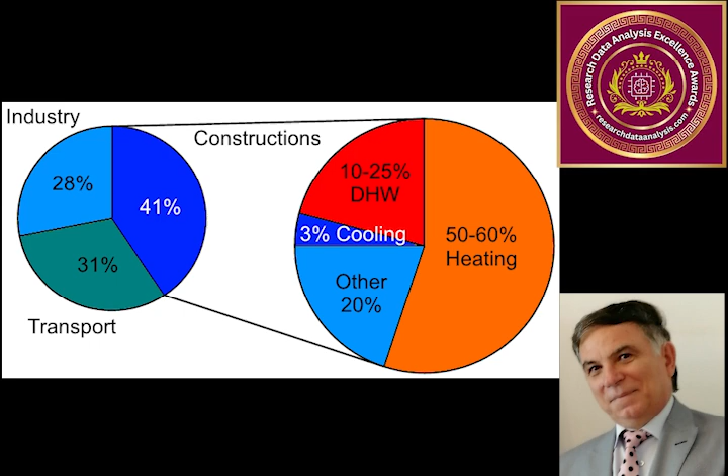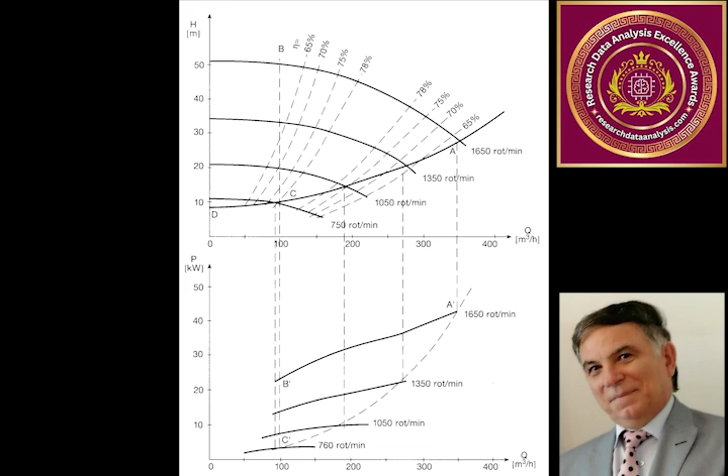Numerous fundamental and advanced theoretical, experimental, and numerical studies were conducted. They have been published in different journals and have made significant contributions to advances in building services engineering, which can be grouped into the following categories. 1. Energy optimization of buildings that simultaneously achieve energy savings, increase comfort, and ensure normal air quality in rooms. 2. Energy analysis, modeling and optimization of district heating systems and low-temperature heat distribution systems in buildings.

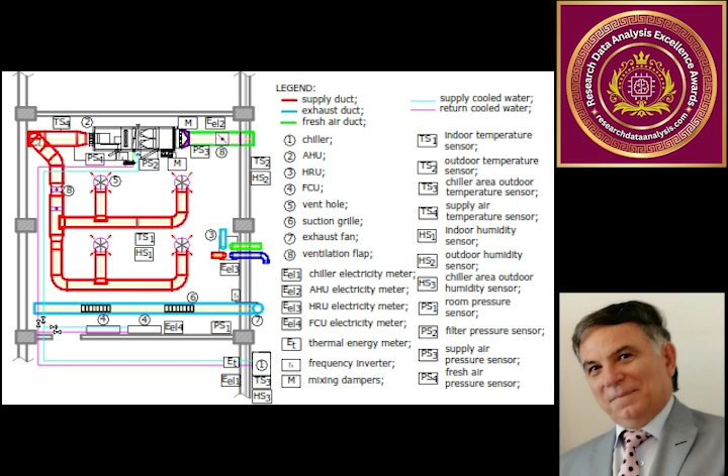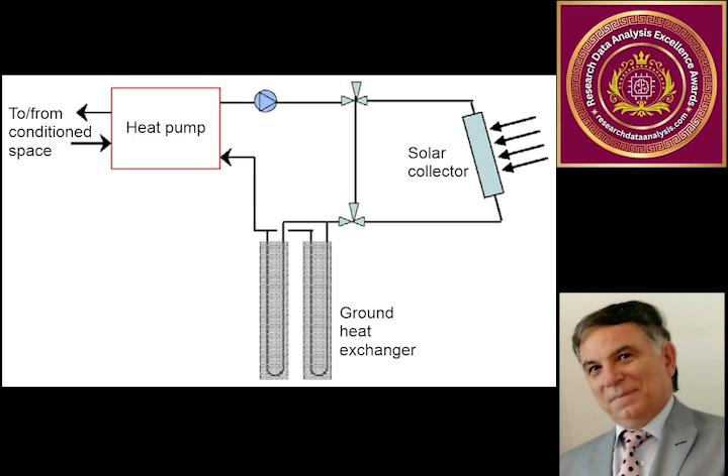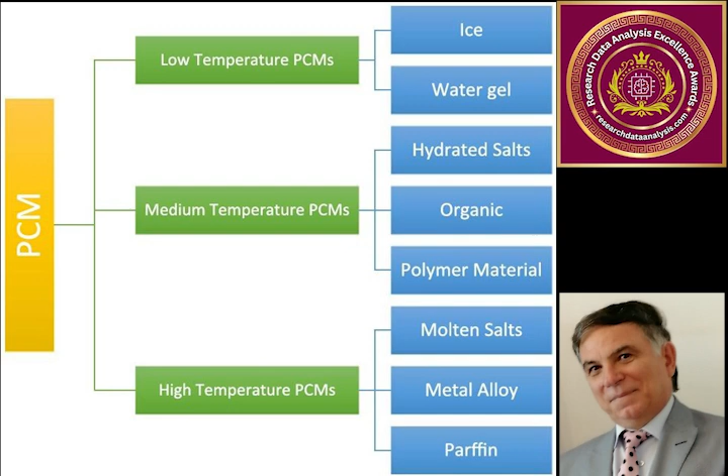3. Improving the energy performance of refrigeration and air conditioning systems, focusing on vapor compression-based systems with ecological refrigerants and implementation of an air-water mist-cooled system for the air-cooled chillers of different HVAC systems. 4. Utilization of renewable energies such as solar heating and cooling systems and geothermal heat pumps. 5. Analysis of thermal energy storage technologies focused on latent heat storage systems associated with phase change materials for use in solar heating and cooling of buildings, solar water heating, and heat pump systems.

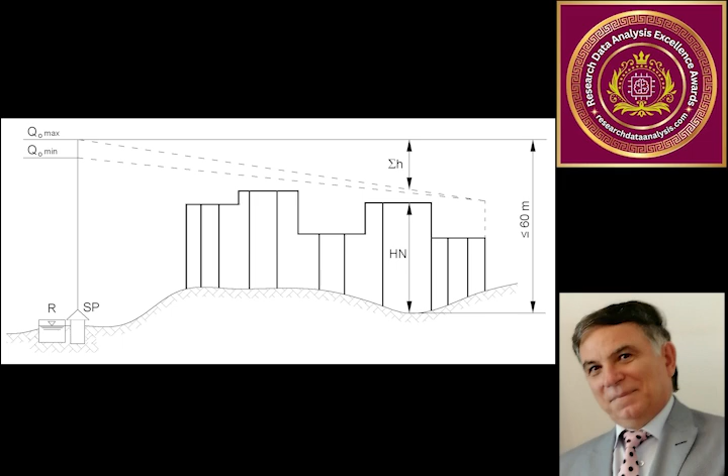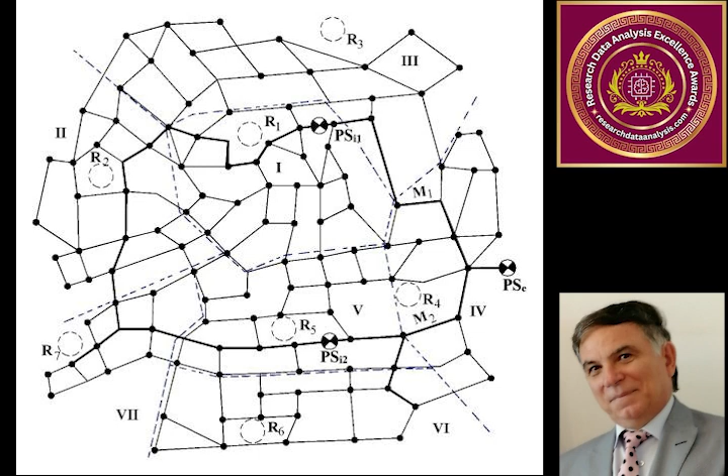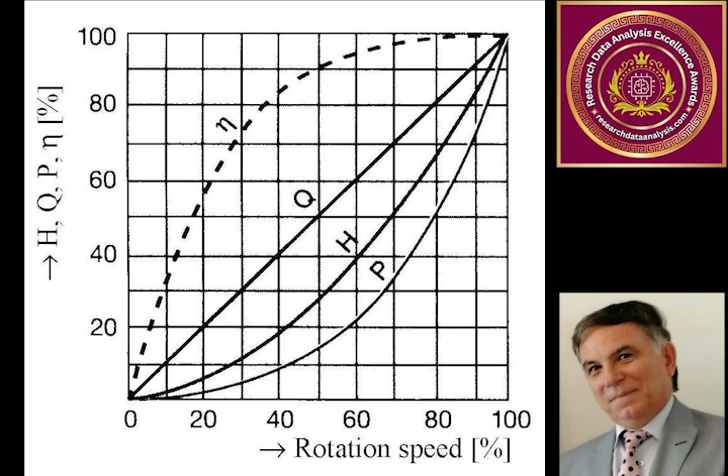6. Hydraulic simulation and optimization of water transmission and distribution systems, including the development of new, high-performance models for hydraulic analysis of loop distribution networks using variational formulations, original models for optimizing design and choosing their optimal route using deterministic methods, as well as proposing solutions to optimize the energy efficiency of these systems. 7. Improving the energy efficiency of pumping in a water or heat distribution system with variable speed pumps and proposing a formula to calculate the efficiency of a variable speed pump when its operating point is altered.

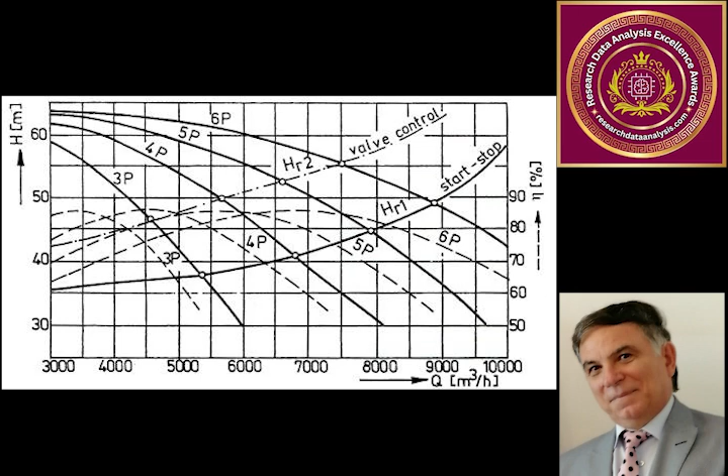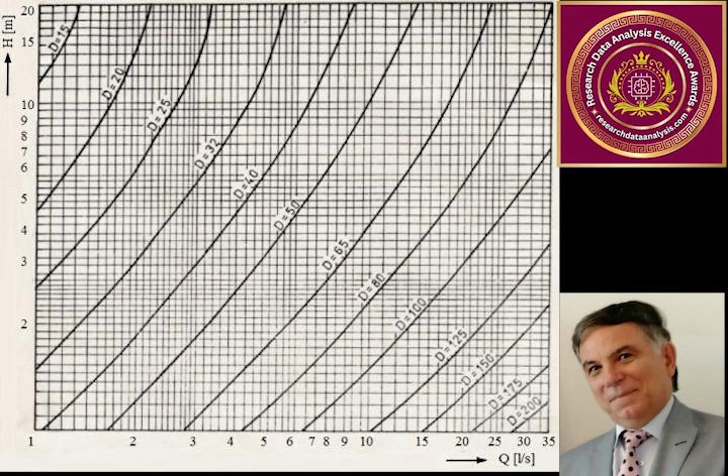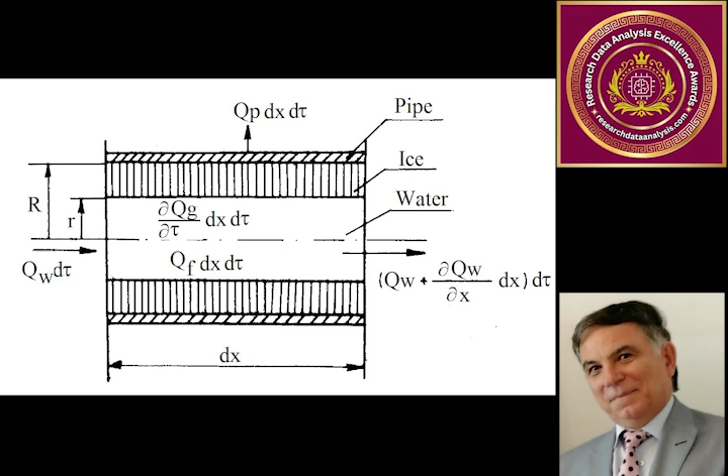8. Designing local sewage treatment plants for small localities and developing a generalized model for hydraulic calculation of complex open channels and vertical sewer columns in buildings. 9. Numerical modeling, simulation, and application of computerized calculation, using both classical and modern numerical methods with finite and boundary elements implemented in original computer programs, as well as the commercial software TRNSYS for transient system simulation. Most of these issues were addressed in the reference book Advances in Building Services Engineering, published in 2021 by the prestigious Springer Publishing House.

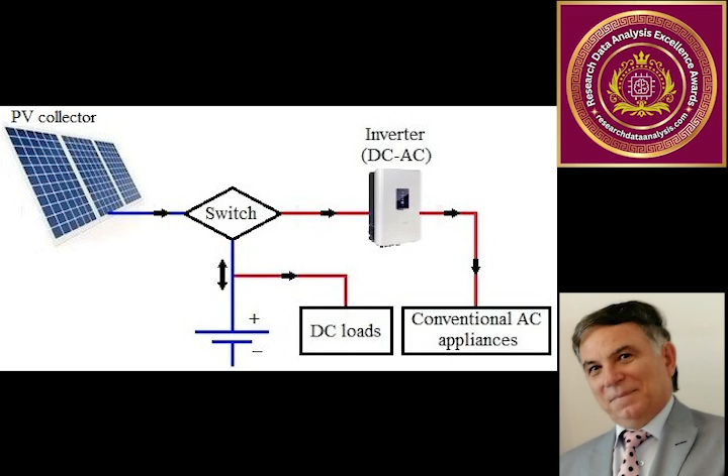To hasten the decarbonization of buildings by 2050, it is imperative to deploy highly energy-efficient technologies, such as the electrification of the thermal sector through heat pumps (HPs) and the integration of renewable energy sources (RES). The most widely applied RES is solar energy, with photovoltaic (PV) cells commonly installed on roofs and walls to convert solar radiation into electricity. Solar thermal collectors are also employed to provide hot water and space heating. Geothermal energy, generated and stored within the Earth's crust, is independent of climatic conditions such as solar radiation or prevailing

wind. For the first time, the European Renewable Energy Directive 2009/28/EC recognizes energy from air, geothermal, and hydrothermal sources as a source of renewable energy, opening up a significant chance to utilize HPs with a seasonal performance factor SPF greater than 1.15/η, where η is the efficiency of power generation from primary energy. Overall, the integration of diverse RES, including solar, wind, geothermal, and hydropower, provides nearly zero energy buildings with complementary and reliable options to balance energy supply and demand throughout the year.

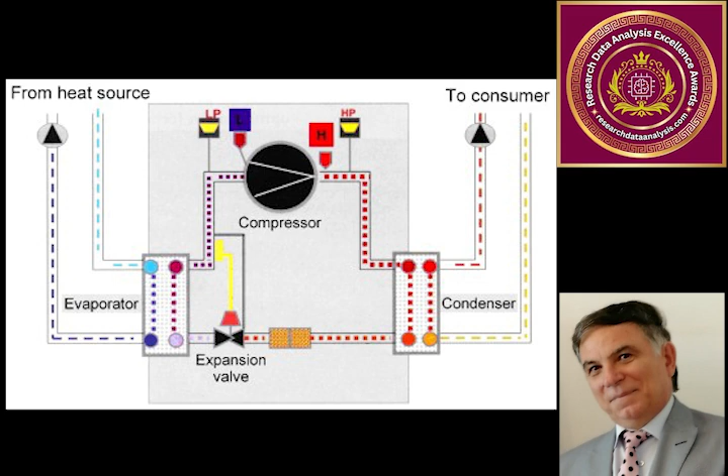In the current context, where the construction sector is responsible for about 40% of final energy consumption and nearly 36% of total CO2 emissions in the European Union, a thorough understanding of the performance, limitations, and potential for integrating these systems into the built environment is essential.

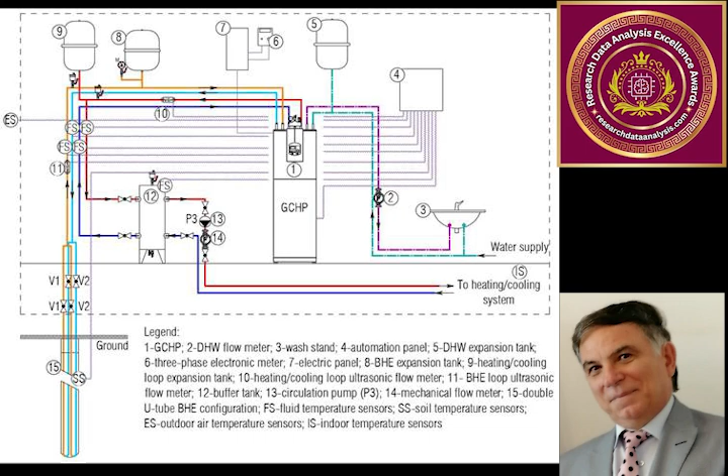Thus, the research experimentally investigating and numerically simulating the performances of various low-temperature hydronic heating/cooling systems connected to a vertical closed-loop ground-coupled heat pump, published by Energy and Buildings in 2023, is focused on the energy efficiency explorations of various low and very low-temperature hydronic radiant heating/cooling systems (floor, wall, ceiling, combined floor-ceiling) and of the medium-temperature radiator heating system, connected to a vertical ground-coupled heat pump (GCHP) in double U-tube borehole heat exchanger (BHE) configuration.

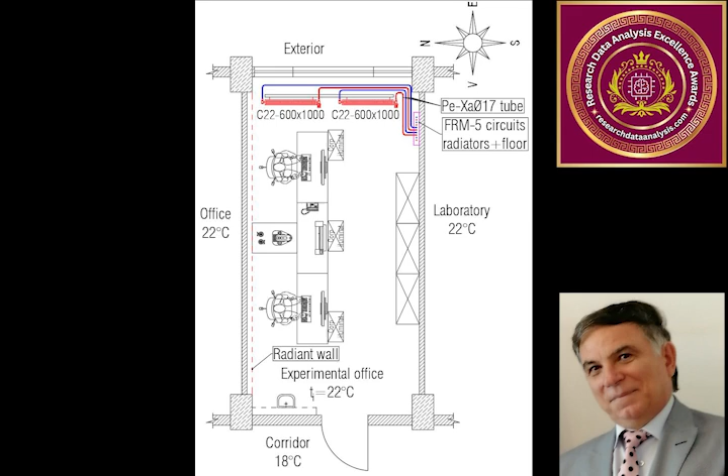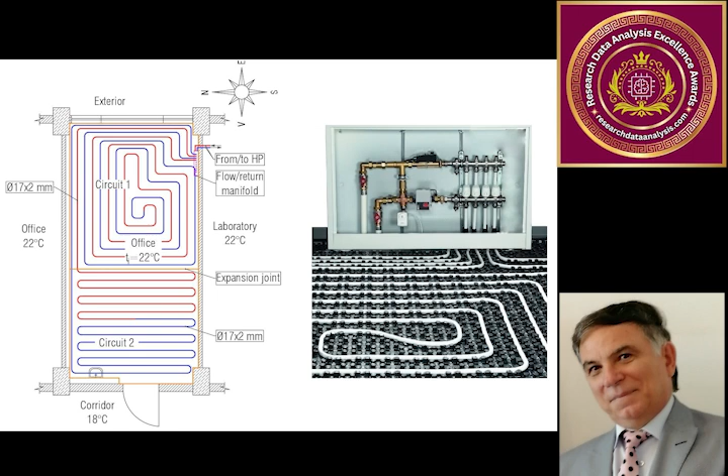The main performance parameters are obtained for 5 weeks of operation in heating mode and 3 weeks in cooling mode, and a comparative analysis of these parameters together with indoor thermal comfort is carried out. The four simple heating systems (radiator, floor, wall, ceiling) have relatively small differences, maximum 7.4%, in their coefficient of performance (COP) values, but the number of stops in the case of radiator heating is twice that of floor heating, which leads to greater wear and tear on the heat pump equipment.

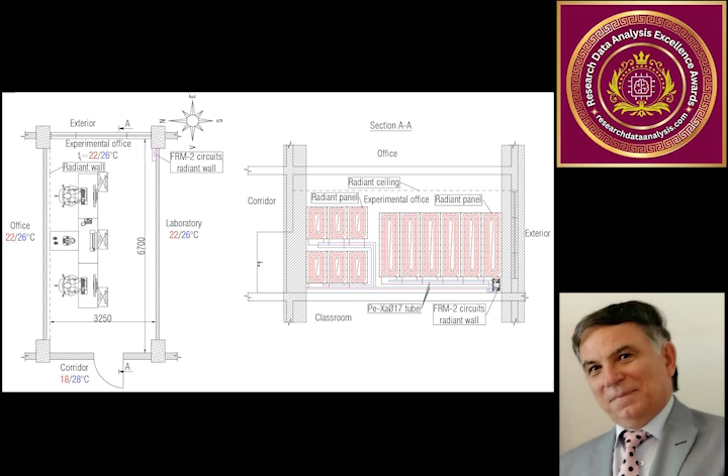Under the same operating conditions, the CO2 emissions of the radiator heating system are 0.716% higher than those of the heating system with radiant panels (floor, wall, and ceiling). The floor-ceiling combined radiant heating system has the highest COPsys of 5.45 as well as the lowest CO2 emission value of 2.15 kilograms. The predicted mean vote (PMV) index per 1.1 met 0.29 clo has values approximately equal to 0 only in the case of the floor-ceiling heating, when the percent of likely dissatisfied with the thermal comfort is 5%.

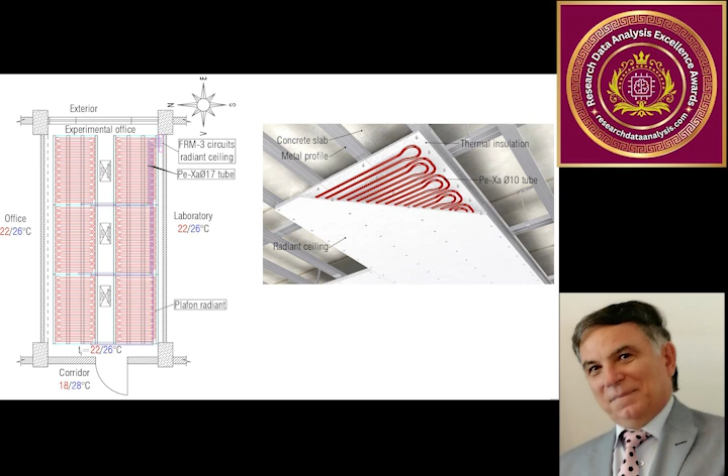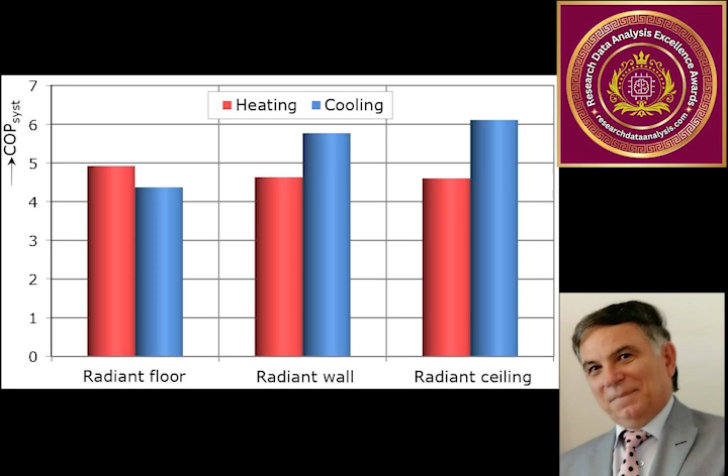The three cooling radiant systems show differences in their energy performance, namely the radiant ceiling cooling system has the best COPsys, 39.8% higher than that of the radiant floor, and only 5.9% higher than that of the radiant wall. The values of the PMV index per 1 met 0.9 clo for the radiant wall cooling system are 31 to 41% lower than those of the radiant floor and 10.4 to 14.2% lower than those of the radiant ceiling.

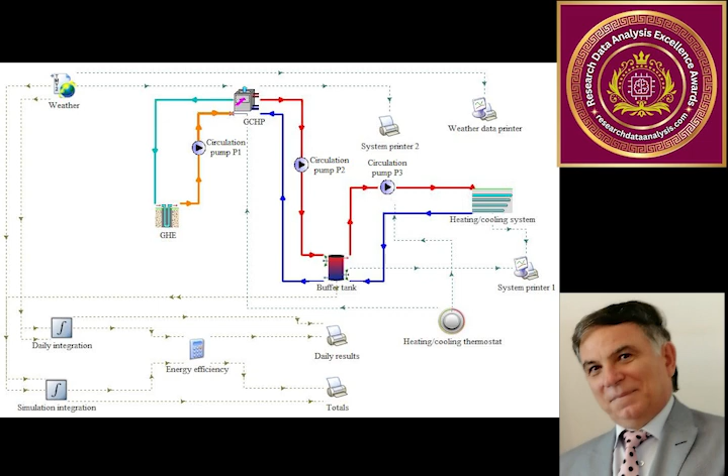Finally, numerical simulations of the useful thermal energy and the system COP in heating and cooling modes are performed with TRNSYS software for a duration of 8,760 hours and then analyzed and compared with the experimental tests to validate the simulation models.

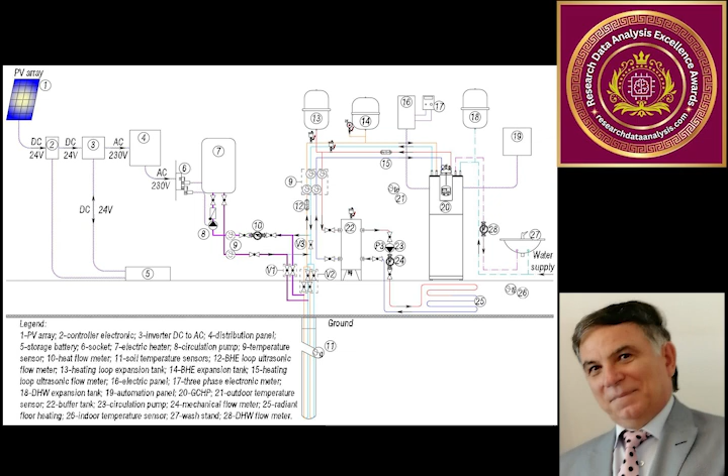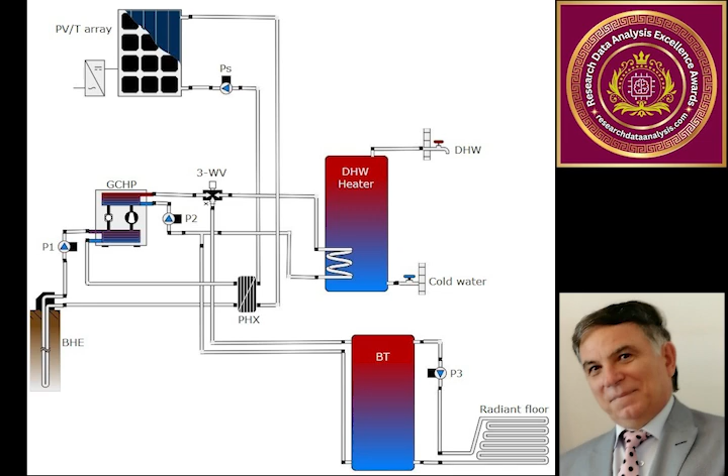The paper investigation by monitoring and numerical simulation of the performance of a ground source heat pump system with and without regeneration in different configurations and operating modes, published by Applied Thermal Engineering in 2024, is focused on restoring the thermal imbalance of the ground caused by conventional ground-coupled heat pump GCHP systems through seasonal and continuous regeneration using a geothermal solar facility, with a vertical GCHP combined with PV and PV thermal (PV-T) panels in a heating-dominated climate, located in Timisoara, Romania. Therefore, the performance of a GCHP system integrated into the heat supply system of an experimental office, operating in single and W2BHE configurations with regeneration in the summer months by injecting heat into the ground,

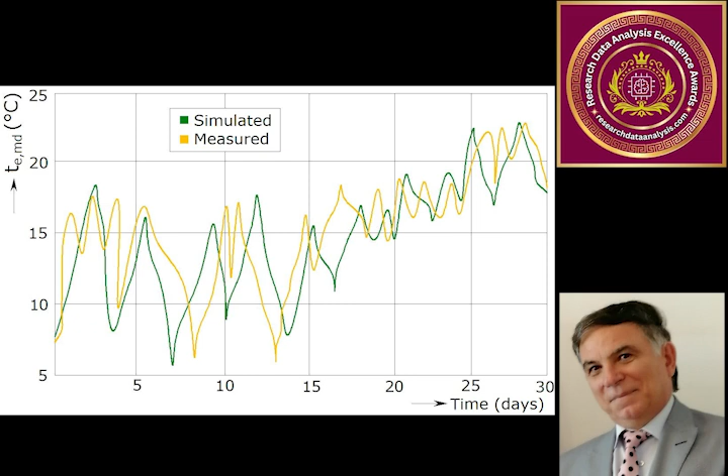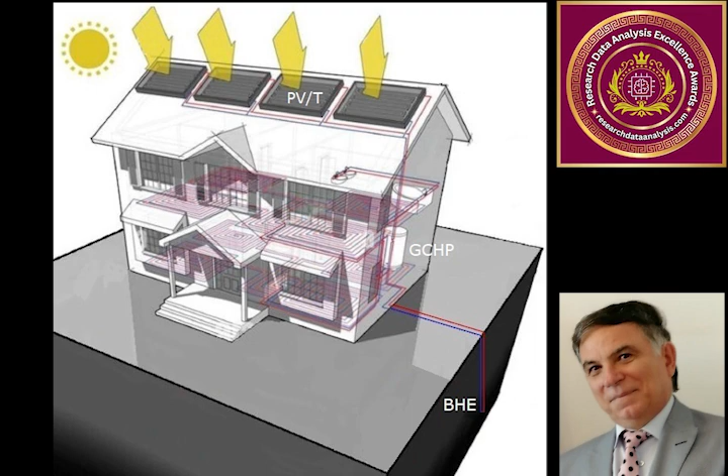is experimentally evaluated. Experimental research has indicated an increase in the average temperature of the working fluid by 2.4% and an improvement in system performance when using heat injection: seasonal performance factor SPF by 3.5% and 6.6% higher, and CO2 emission by 1.2% and 3.8% lower in the single and W2BHE configurations, respectively.

Additionally, numerical simulations with Polysun software are used to test the performance of the hybrid GCHP-PV-T system with continuous PV-T panel regeneration throughout the year, and of a conventional GCHP integrated into the heating and DHW production systems for a single-family building. The simulations were experimentally validated through measurements on the geothermal solar facility for heating and domestic hot water (DHW) production in the experimental office.

The simulation results show that the SPF values of the hybrid GCHP-PV-T system in the single and W2BHE configurations, 6.00 and 5.79, respectively, are 32% and 34% higher than those of the conventional GCHP system, 4.56 and 4.32, respectively. In addition, the SPF in the single BHE configuration is 3.6% higher than in the W2BHE configuration for the GCHP combined with the PV-T array of 31.8 square meters.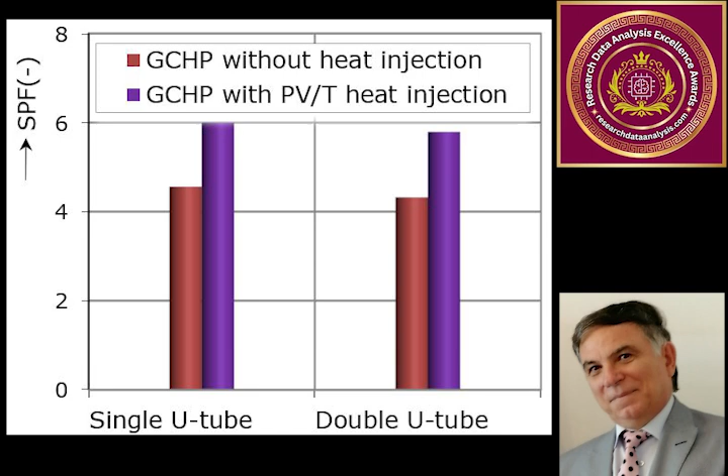The study thermal protection impact assessment of a residential house on the energy efficiency of the air source heat pump radiant floor heating system, published by Thermal Science and Engineering Progress in 2025, investigates, through both in situ measurements and numerical simulations, the thermal protection impact of a residential house located in Timisoara, Romania, on the effectiveness of the floor heating system interconnected to an air source heat pump ASHP in two test cases: 1, conventional ASHP, and 2, hybrid ASHP with PV collectors.

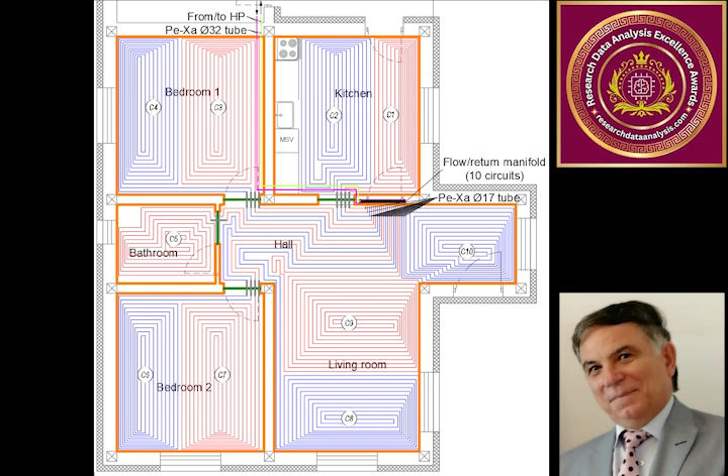The performance of the heating facility supplied by the conventional ASHP is evaluated through in situ monitoring in heating mode for the house envelope, both without thermal protection and with 15 cm thick expanded polystyrene EPS insulation. COPASHP and COPsys values of 3.59 and 3.3 were obtained for the solution with a non-thermally insulated envelope, and 3.92 and 3.53 for the solution with an EPS insulated envelope, higher by 8.4% and 5.4%, respectively. Also, the CO2 emissions for the second solution were 42.3% lower than those for the first solution.

Additionally, the main performance parameters of the heating system supplied by the ASHP combined with a PV array of 7.8 square meters are investigated through numerical simulation using Polysun software, both in heating and DHW mode.

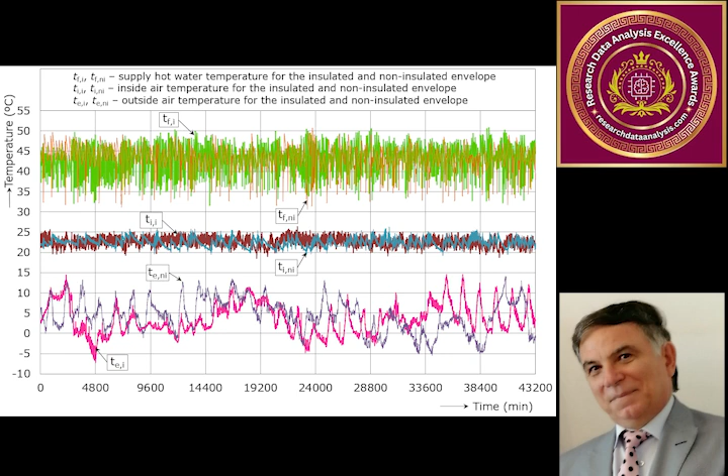For the building without thermal insulation, and with 15 cm thick insulation from different materials, such as EPS, extruded polystyrene XPS, mineral wool MW, and polyurethane PUR. The PUR insulation yields the best seasonal performance factor SPF for the hybrid ASHP PV plant, both in the heating regime, 6.95, and in heating and DHW mode, 5.54, closely followed by the MW insulation.

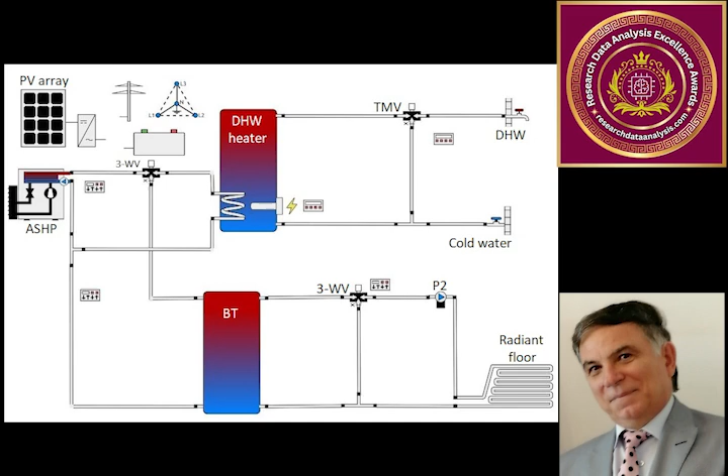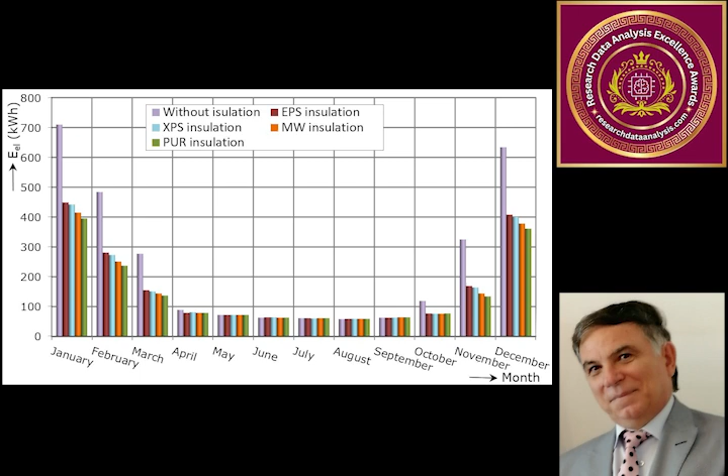The novelty of this study does not necessarily lie in a shorter investment recovery period than that of simple insulation, but in an integrated analysis that combines in situ monitoring data with numerical simulations using Polysun, which provides a robust approach for validating the results.

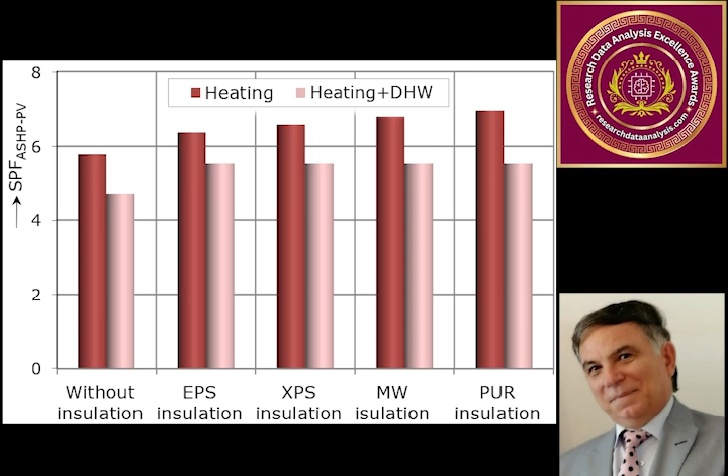However, future research should focus on quantifying the impact of ice formation on the evaporator on the seasonal SPF of ASHPs at low temperatures, which involves monitoring defrost cycles, quantifying the energy consumed specifically for defrosting, and analyzing the impact on SPF and sensitivity to freezing conditions, relative humidity, and outdoor air temperature.

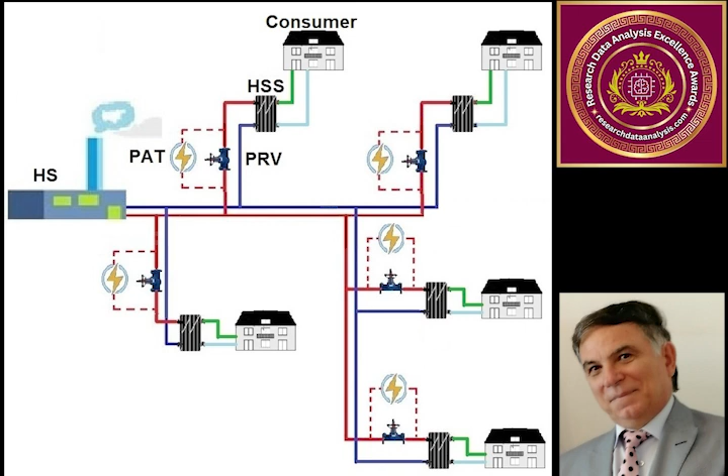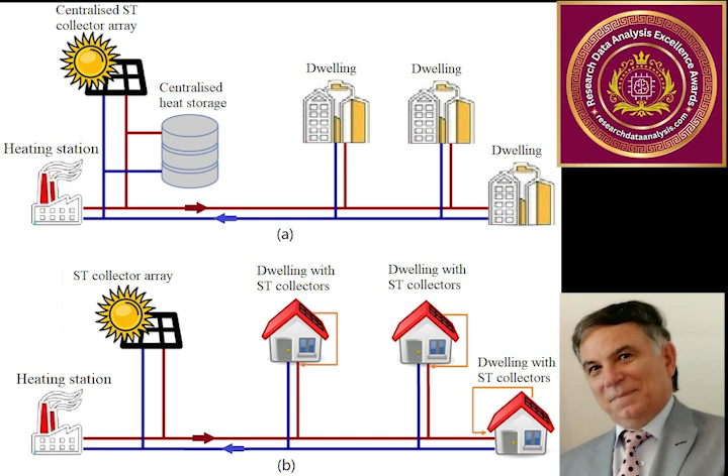The study, an exhaustive overview of advances in integrating renewable energy sources into district heating systems, published by Sustainable Cities and Society in 2024, offers a comprehensive review of the recent advances in various aspects of district heating systems, DHSs, focusing on the fourth and fifth generations of heat distribution networks integrated with different RES. The review highlights the integrated approach of various advanced renewable technologies applied to DHSs, such as solar and geothermal energy, biomass, industrial waste heat, and especially the implementation of conventional heat pumps, HPs, and solar-assisted HPs with solar thermal, PV or PVT panels in resilient and sustainable buildings and DHSs to increase energy and environmental performances.

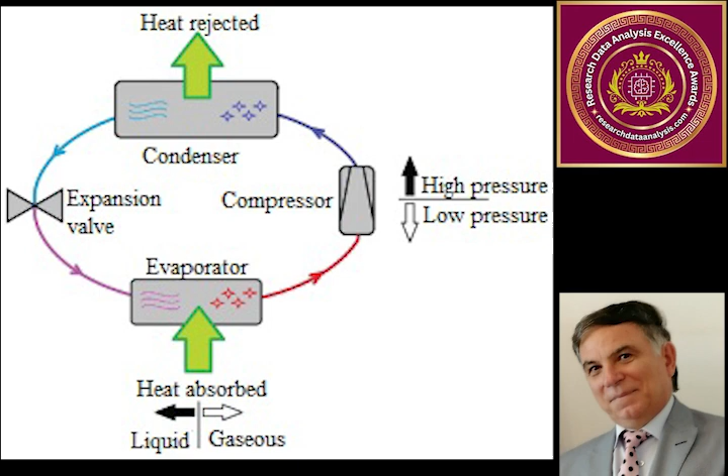The exergetic effectiveness of refrigerant can be used to evaluate quickly the HP energy efficiency only with the values of the operating temperatures and to evaluate the energy performance of the HP PVT hybrid system. The use of the global seasonal performance factor is also considered. Additionally, it shows the possibility of recovering excessive pressure from DHSs using pumps working as turbines.

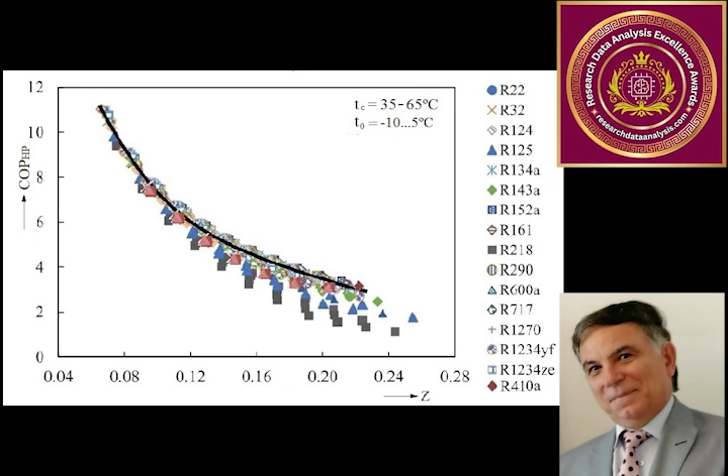The study also describes the major components and evolution of DHSs, briefly reviews low and ultra-low temperature DHSs and implementation of borehole and hot water TES technology into DHS. It also discusses the main optimization techniques, simulation tools, control methods, and maintenance for DHSs, as well as alternative connection modes of RES to DHS.

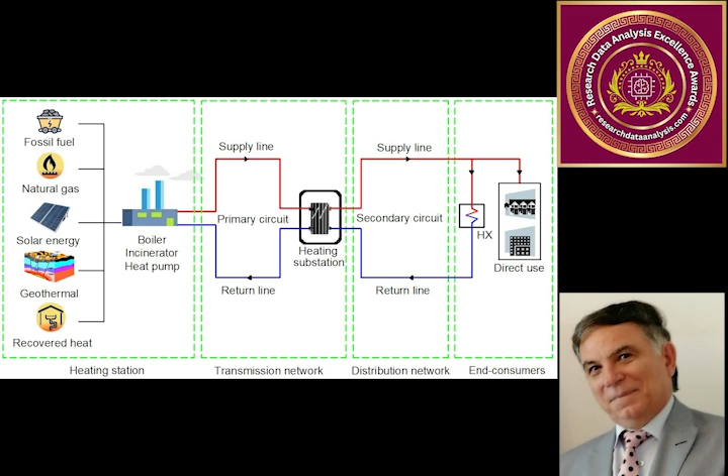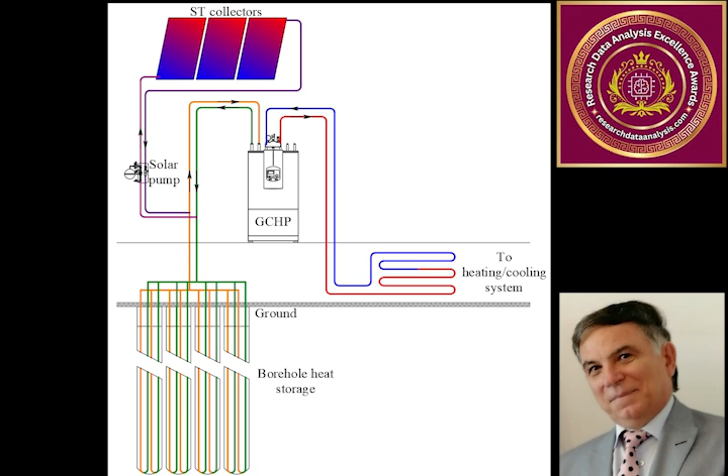Different methods of modeling district heating, DH, networks exist. The most widely used is the coupling of the node method with the Newton-Raphson algorithm. Meta-heuristic optimization methods for DH networks, such as genetic algorithms, simulated annealing, ant colony optimization, and particle swarm optimization, have attracted greater interest recently. These techniques solely utilize objective function values to find the optimum, resulting in significant computation time.

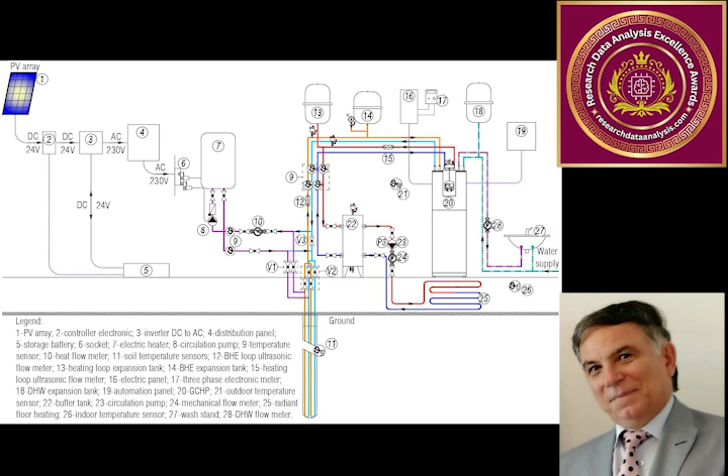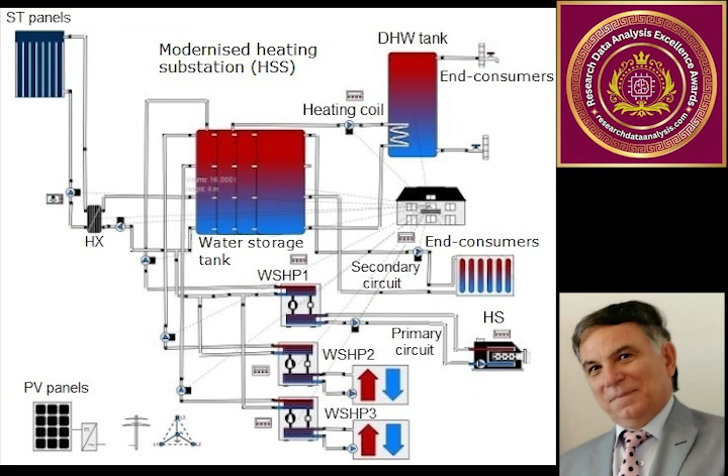Finally, some original research and a literature review are included on several applications of implementing various RES in resilient and sustainable buildings and DHS as part of smart cities' intelligent, sustainable energy systems. The development of district heating calls for more adaptable energy systems that must include building automation, RES, and greater prosumer involvement. Further investigation is required to identify the specific challenges in monitoring, operating, and maintaining the 4GDH and 5GDH networks, enabling proactive maintenance techniques to be successfully applied.

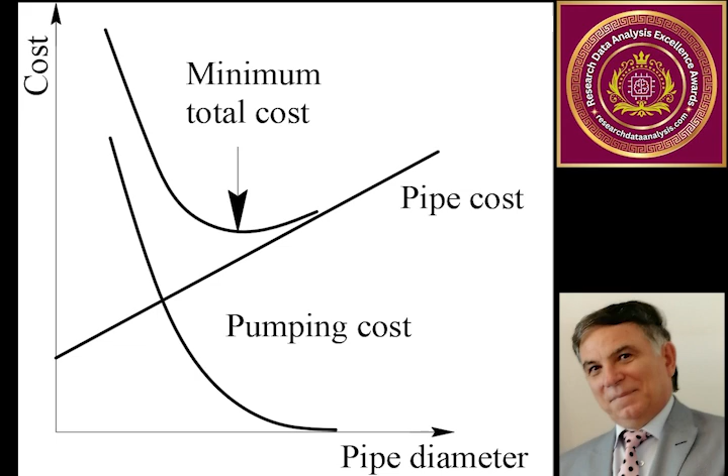Another work from the last 3 years, entitled Optimization of Urban Water Distribution Networks Using Heuristic Methods: An Overview, published by Water International in 2023, provides an exhaustive overview of the most commonly used heuristic optimization techniques for water distribution networks, WDNs, focusing on their optimal design. A single and multi-objective optimization problem is formulated, and the main optimization objectives, decision variables, and constraints for the design, rehabilitation, and operation of WDNs are synthesized and discussed.

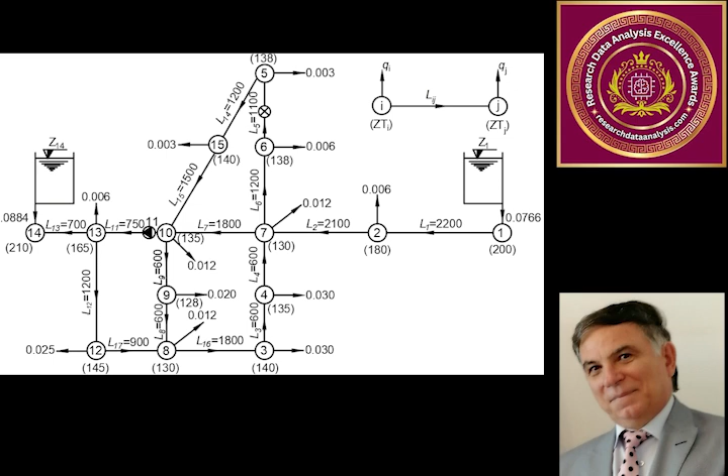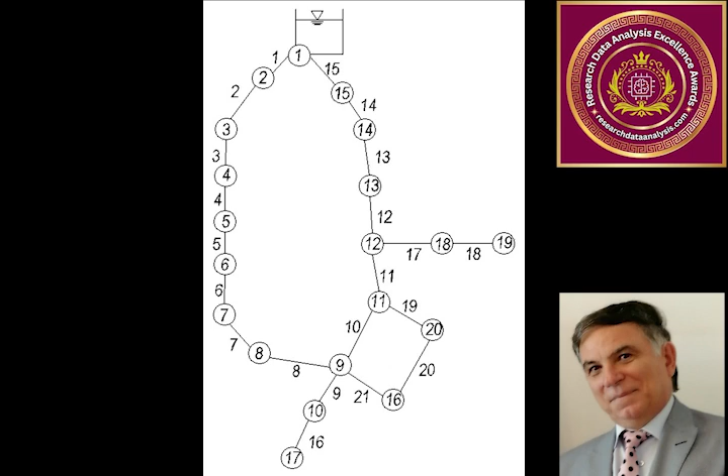Additionally, the primary heuristic methods are briefly described and classified. Finally, the literature on heuristic optimization models for WDNs is reviewed, and the advantages and disadvantages of the heuristic techniques used for WDN design are discussed, along with recommendations for future research directions. This extensive study makes the following contributions: a comprehensive collection of studies in the WDN area using optimization methods, evaluation of the performance of some of the most widely used heuristic algorithms, identification of the main shortcomings in the literature, and the proposal of additional studies to develop this research field.

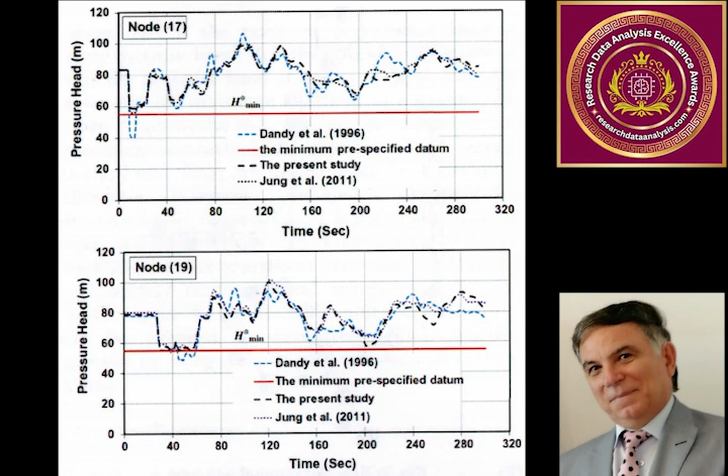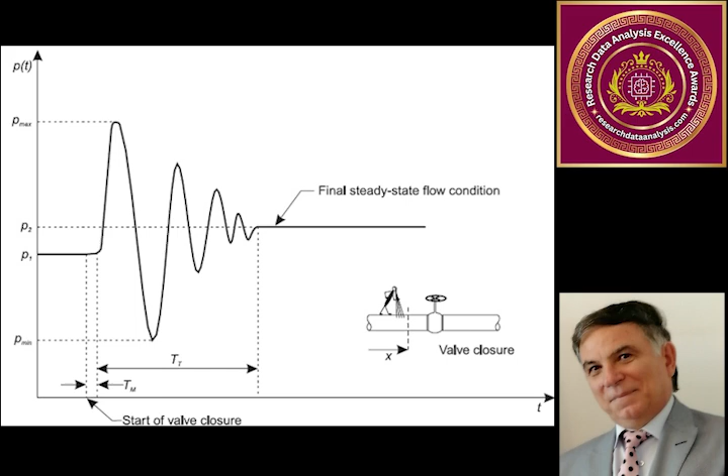Further research on heuristic techniques should focus on hybrid methods that combine the specific advantages of different approaches, although they are difficult to program and implement. These studies should also use hyperheuristic methods for optimizing WDNs, which are more general and can solve a broader range of problems than current metaheuristic methods specialized in a narrow class of issues. All these studies, published in indexed Clarivate journals, support the dissemination of Romanian research results worldwide and the advancement of knowledge.